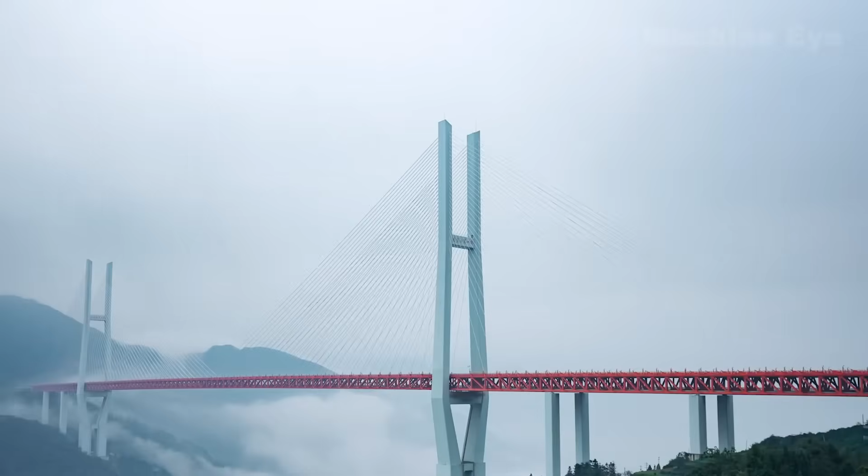Have you ever wondered how, in just a few decades, China transformed from having nothing into a global infrastructure powerhouse? The answer is hidden in this land bustling with activity. China, hailed as the infrastructure maniac, Chinese engineers have written their own legend through a series of world-shocking megaprojects. The once arrogant United States, upon witnessing China's true infrastructure might, had no choice but to bow down. They knew that many of the projects China built were simply beyond American capability.

Former US President Trump once openly declared that America would never be able to compete with China.

I love China. People say, oh, you don't like China. No, I love them. But their leaders are much smarter than our leaders. And we can't sustain ourselves. China, you go there now, roads, bridges, schools, you never saw anything like it. They have bridges that make the George Washington Bridge look like small potatoes. And they're all over the place.

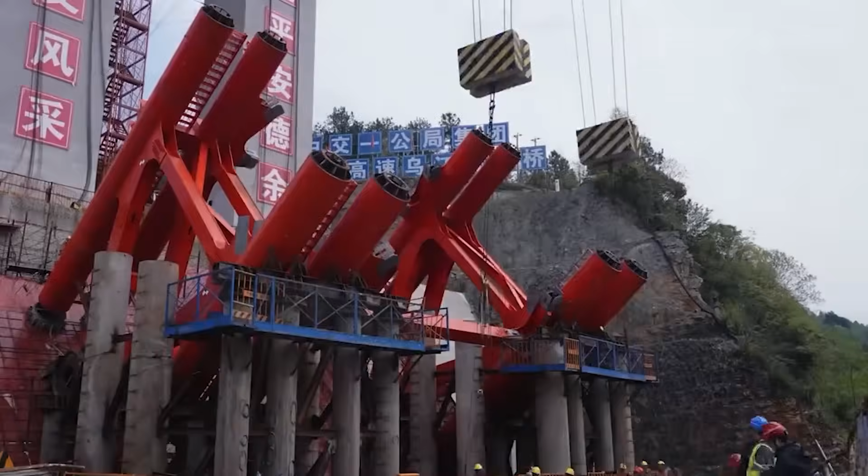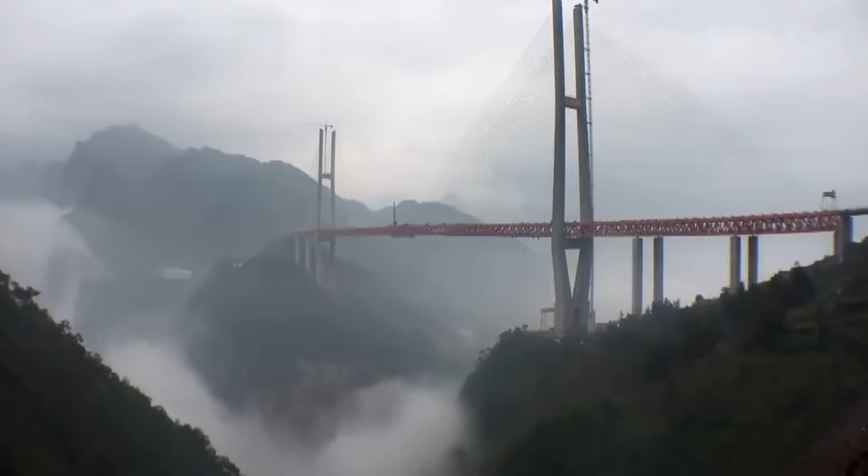When it comes to constructing large-scale projects, China literally clears mountains and builds bridges over waters, forging ahead through every obstacle just to create one engineering marvel after another. So, just how incredible is China's strength in infrastructure? And what untold secrets lie behind the nation's cutting-edge construction technology for mega projects? In this video, we will delve deep into the stories behind China's giant engineering feats.

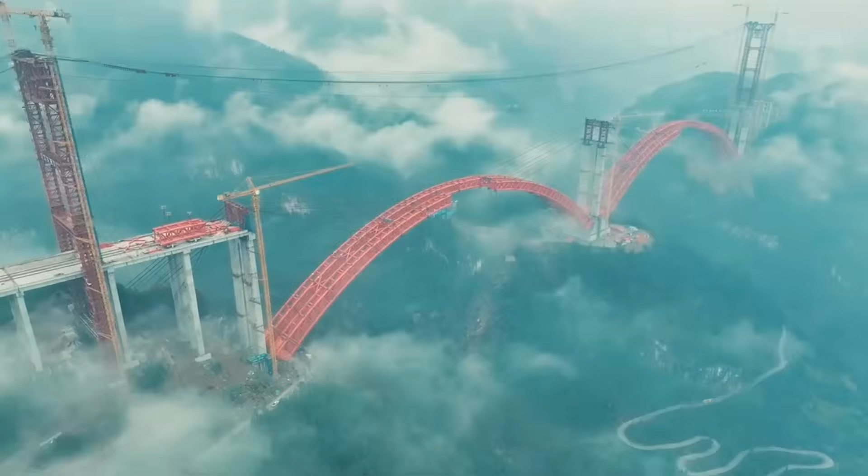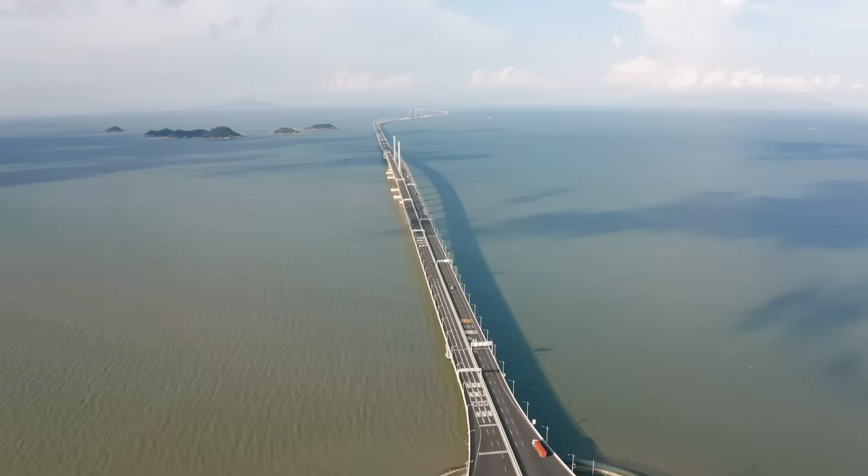As one of the world's largest developing countries, China has long driven its economic and social development through infrastructure. Its engineers are like superheroes in the field of construction, dedicated to creating monumental projects that meet the demands of a continually growing population. From the Baihetan hydropower station rising from the banks of the Yangzi River to the spiraling tunnel of the Yaxi Expressway that seems to float among the clouds, from the world's highest Qinghai-Tibet Railway to the Hong Kong-Zhuhai-Macau bridge spanning the Lingdingyang, from the hellish difficulty of the Sichuan-Tibet Railway to the 50-meter deep tunnel under the Pearl River estuary, Chinese engineers have redefined the limits of human infrastructure with projects once thought impossible.

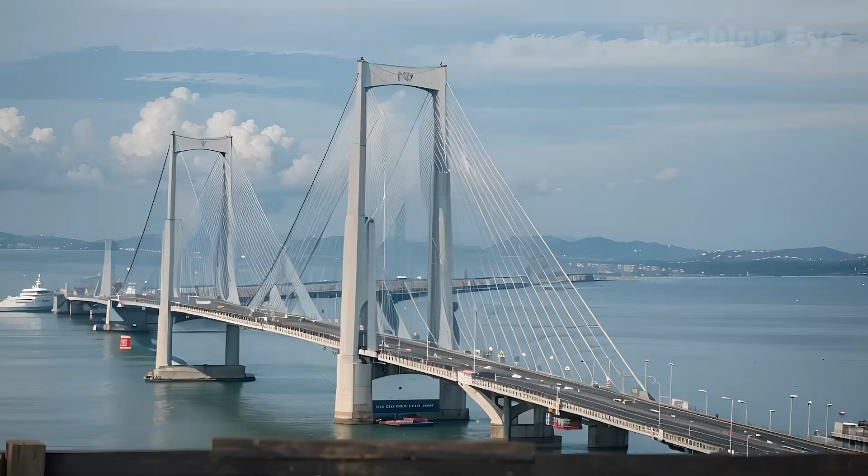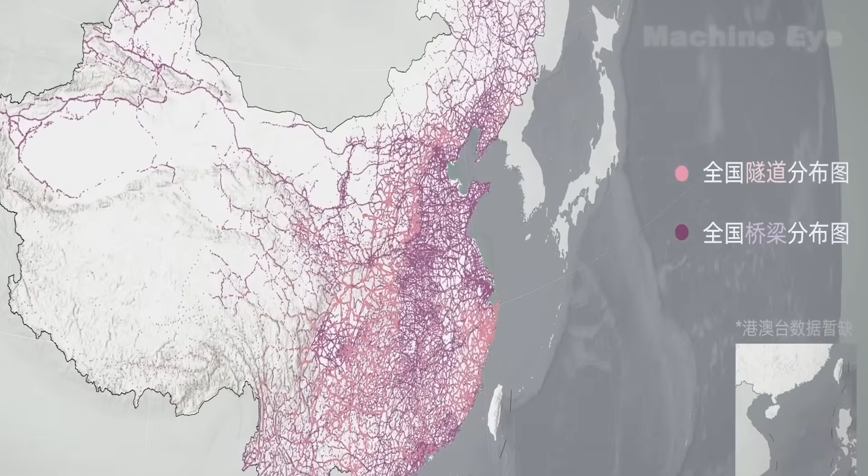While Americans were still embroiled in debates over repairing century-old bridges, China was reshaping the surface of the Earth by constructing 16,000 kilometers of highways and 4,000 kilometers of high-speed rail each year. When China's railway network in 1949 measured only 21,000 kilometers, with half of it in disrepair, who could have imagined that 75 years later, the nation would weave a traffic network spanning 45,000 kilometers of high-speed rail and 180,000 bridges, enabling people to travel thousands of miles in a single day?

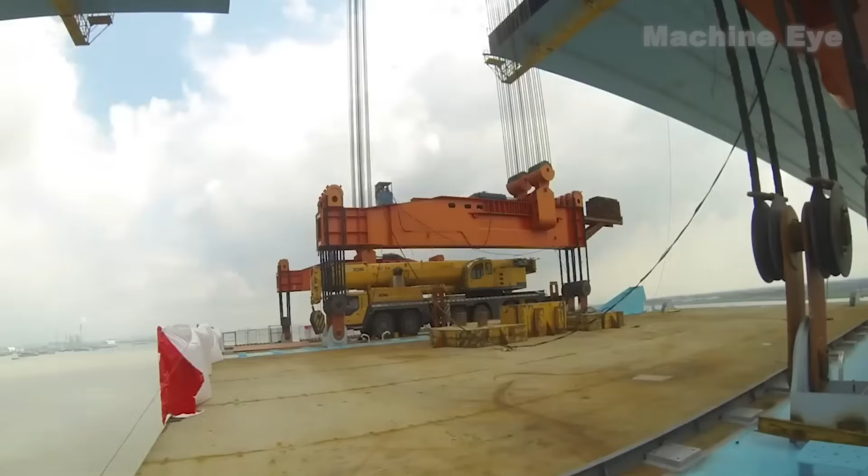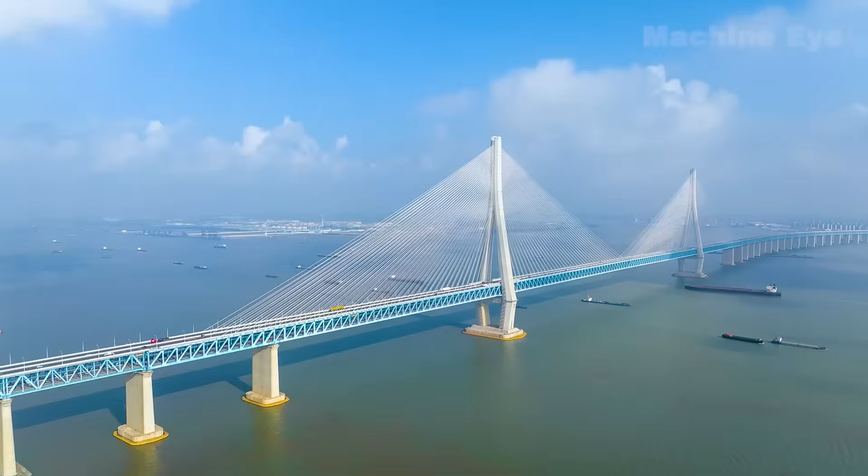Behind these achievements lies an Eastern wisdom that has upended Western perceptions. During the construction of the Hutong Yangtze River Bridge, China has developed a specialty steel possessing a tensile strength of 500 MPa, equivalent to a steel cable as thick as a chopstick lifting 3 main battle tanks. This breakthrough in material means that a cable-stayed bridge designed for both road and rail, with a 1,092-meter main span, is no longer merely a theoretical concept. As the world's first road-rail cable-stayed bridge with a main span exceeding 1,000 meters, it not only serves as the golden link of the Yangtze River economic belt but also stands as the pinnacle of Chinese infrastructure innovation.

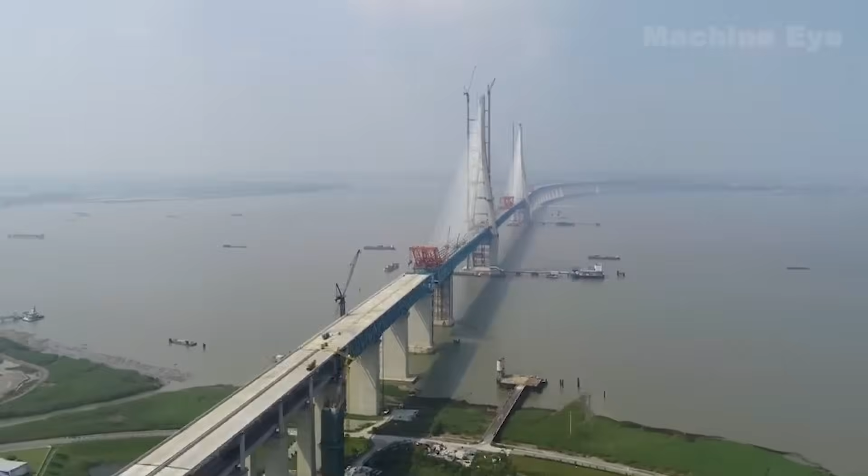The bridge features a main span of 1,092 meters, with two 330-meter high diamond-shaped main towers soaring into the sky, equivalent in height to a 110-story building. These towers bear an axial force of 300,000 tons, functioning like the mythical sea-calming needle that stabilizes the waters, their foundations firmly anchored in the riverbed.

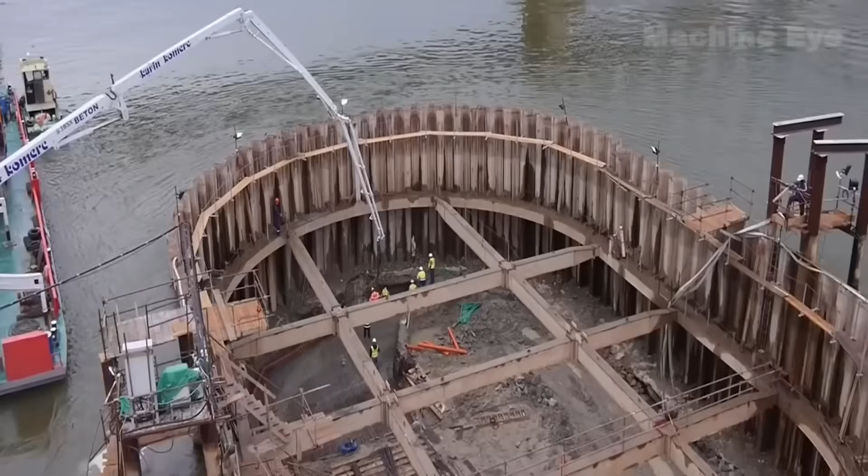To conquer the complex hydrological environment of the lower Yangtze River, engineers pioneered a groundbreaking precision positioning technology for a 15,000-ton steel caisson. They constructed a colossal caisson foundation spanning 5,100 square meters on the dynamic, sediment-laden riverbed, equivalent in area to 12 basketball courts, setting a world record.

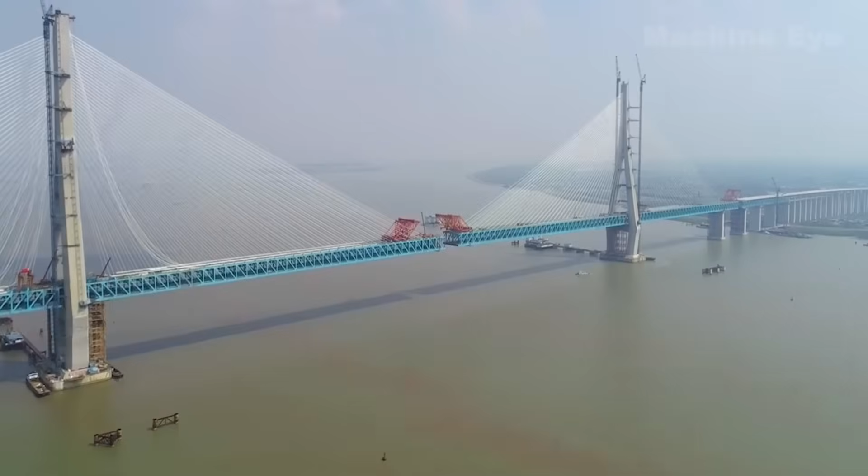The bridge employs self-developed ultra-high-strength steel that surpasses conventional materials in strength, paired with 2,000 megapascal grade stay cables. This steel and concrete framework supports a superload of 480,000 tons of steel and 2.3 million cubic meters of concrete, equivalent to the steel used in 12 Bird's Nest stadiums and the concrete volume of 8 national grand theaters.

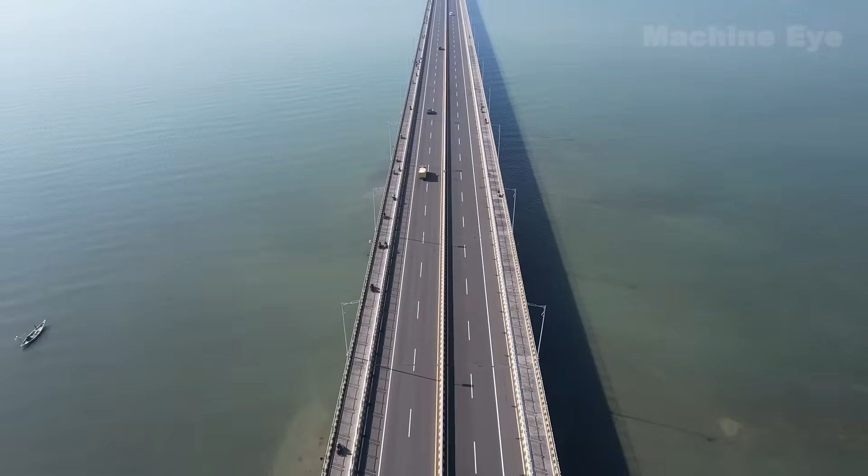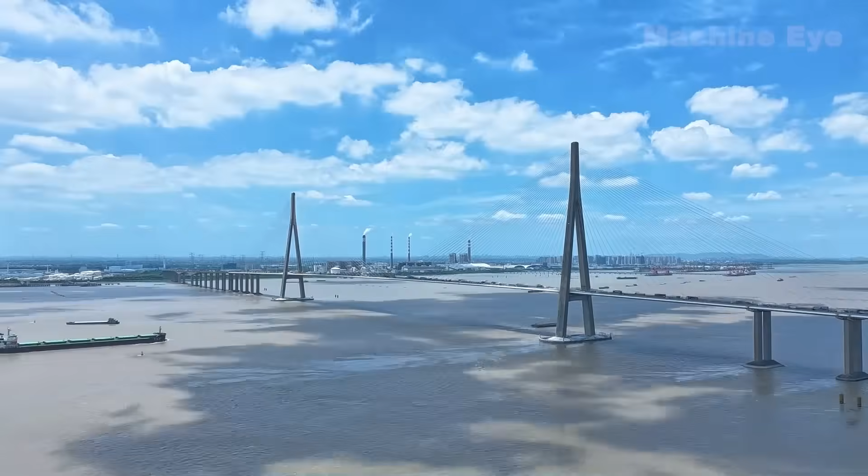By reducing the travel time between Nantong and Shanghai from 5 hours to just 1, the Hutong Yangtze River Bridge has revitalized the Yangtze River Delta's transport network, effectively unblocking the region's critical arteries like the meridians in traditional Chinese medicine. The bridge carries the Xitong Expressway, Hutong Railway, and Tongsujiayong high-speed rail, handling over 100,000 vehicles daily and 80 million tons of annual freight, forming a super corridor linking coastal economic zones.

Its 1,092-meter-wide main channel accommodates 100,000-ton vessels, achieving harmonious coexistence of maritime and land transport. International netizens marveled at the spectacular steel beam closure process.

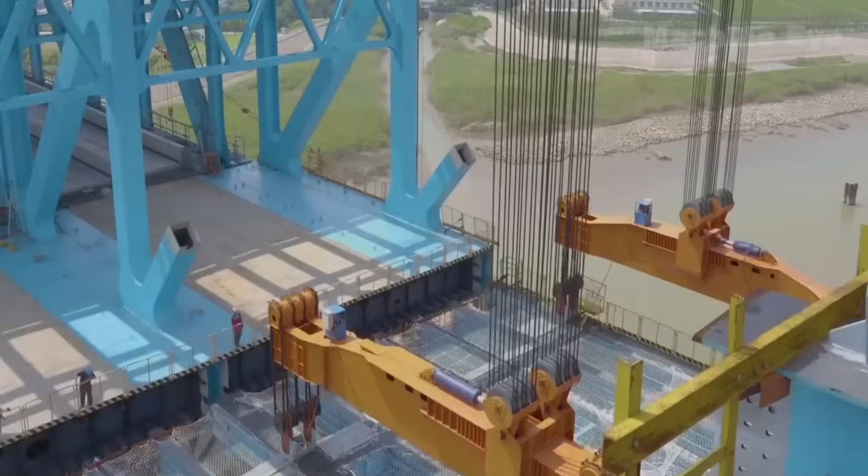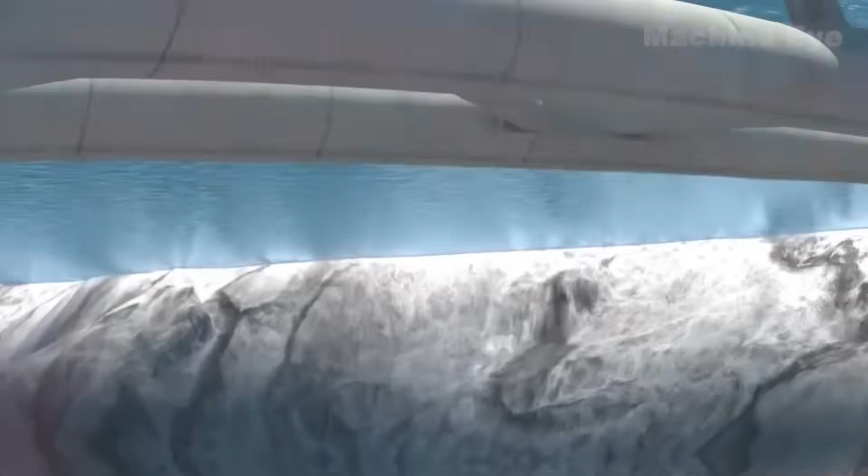Through the Hong Kong-Zhuhai-Macau Bridge, Chinese technical standards are gaining global recognition. As foreign media noted, while other countries are still debating how to build bridges, China is already defining the future through its actions.

Beneath the waves of the Lingding Channel, a 6.7-kilometer steel leviathan silently intertwines Hong Kong, Zhuhai, and Macau. This is the Hong Kong-Zhuhai-Macau Bridge's undersea tunnel, the world's longest road-immersed tunnel, standing as the pinnacle of China's infrastructural wisdom and daring.

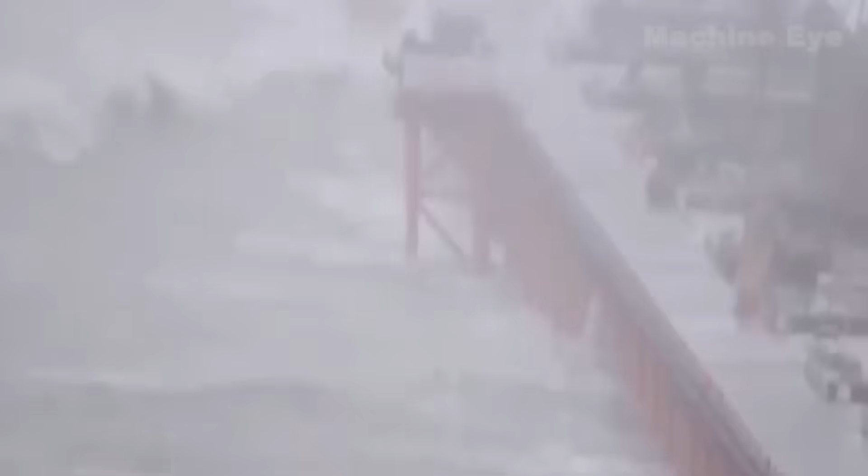But why did Chinese engineers choose this underwater path? The answer lies in dual challenges. Lingding's waters host both bustling international shipping lanes and flight paths beneath Hong Kong International Airport. Traditional bridge towers would have endangered maritime navigation and aircraft operations, while dynamic seabed sedimentation made conventional piers unstable.

Demonstrating extraordinary vision, Chinese engineers pioneered a revolutionary bridge-island-tunnel cluster design. Artificial islands now seamlessly transition surface bridges to submerged tunnels, simultaneously safeguarding navigation, overcoming airspace restrictions, and conquering geological complexities.

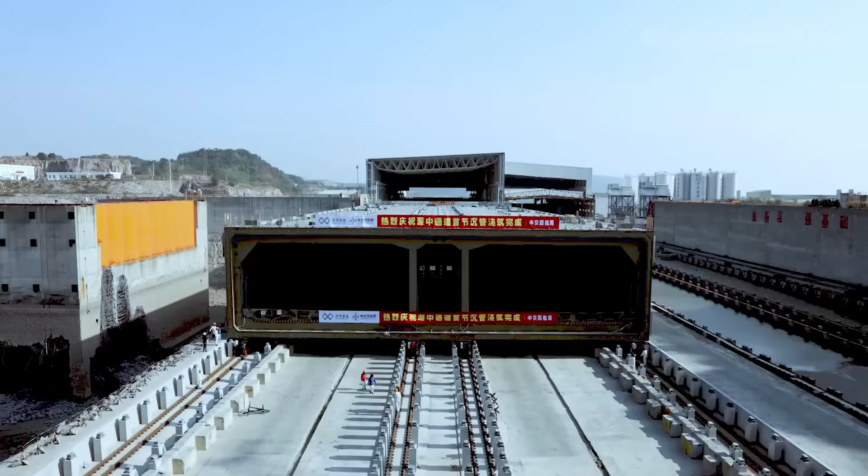At Zhuhai's Niutou Island, in the world's largest immersed tube prefabrication facility, 33 massive tube sections were quietly produced. Each section is 180 meters long and weighs 74,000 tons, comparable in scale to a medium-sized aircraft carrier.

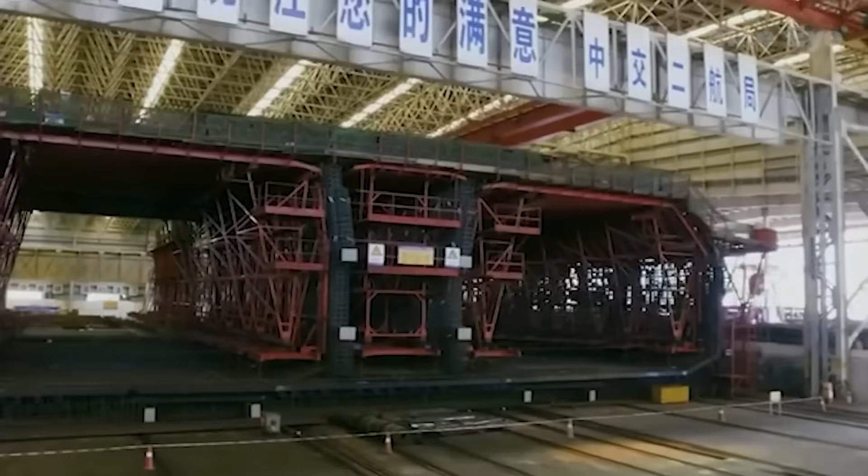Engineers pioneered the curved immersed tube factory method, fabricating curved tube sections with a radius of 5,500 meters to millimeter-level precision, breaking free from the limitations of straight-line production.

Once towed from the prefabrication yard to the construction site, these tubes must navigate complex ocean currents. A formation of 8 high-powered tugboats, coordinated by satellite positioning and an intelligent control system, precisely delivered each tube section into position. Then, harnessing the buoyancy of water, the immersed tube gently descended 44 meters to its seabed foundation trench.

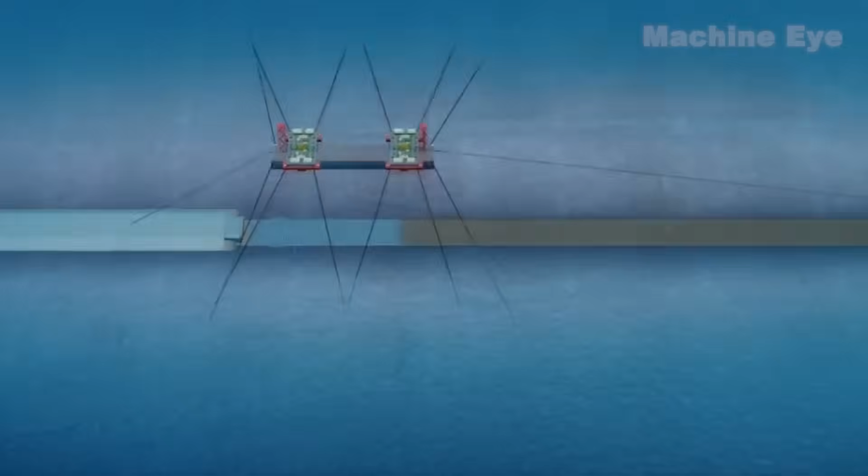Through China's independently developed deep-water unmanned installation system, an astonishing joint tolerance of merely 3 millimeters was achieved between tube sections, a precision feat lauded by international media as the subsea kiss of perfection.

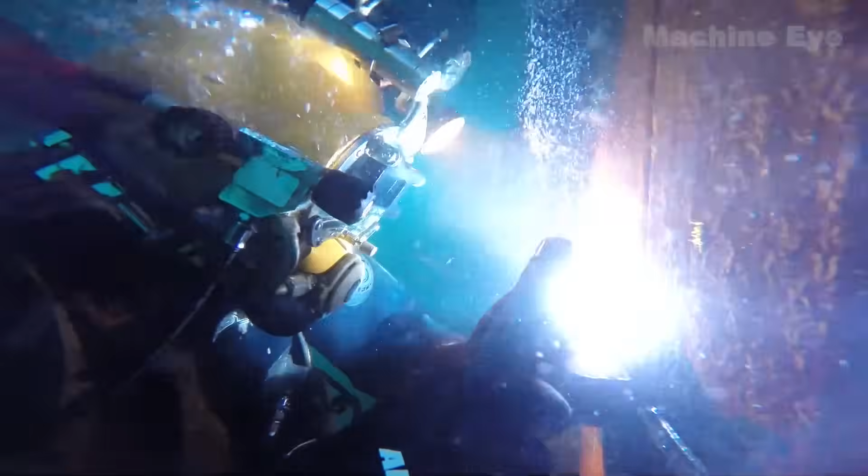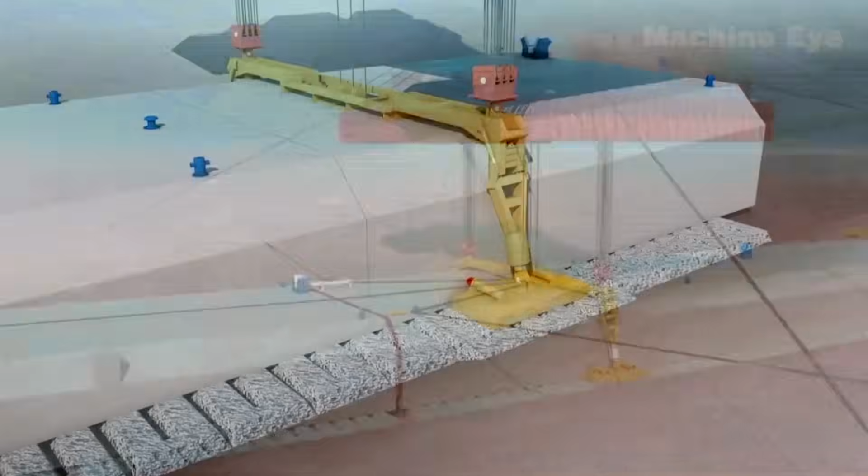Traditionally, immersed tubes rely on risky underwater welding to ensure watertight seals. Chinese engineers pioneered a revolutionary active compression sealing technology. They installed retractable steel bulkheads at tube ends, employing hydraulic systems to actively compress rubber gaskets, transforming manual processes into mechanized operations that guaranteed absolute water impermeability. This innovation enabled the final joint installation to be completed in just 1 day, achieving a 10-fold efficiency improvement.

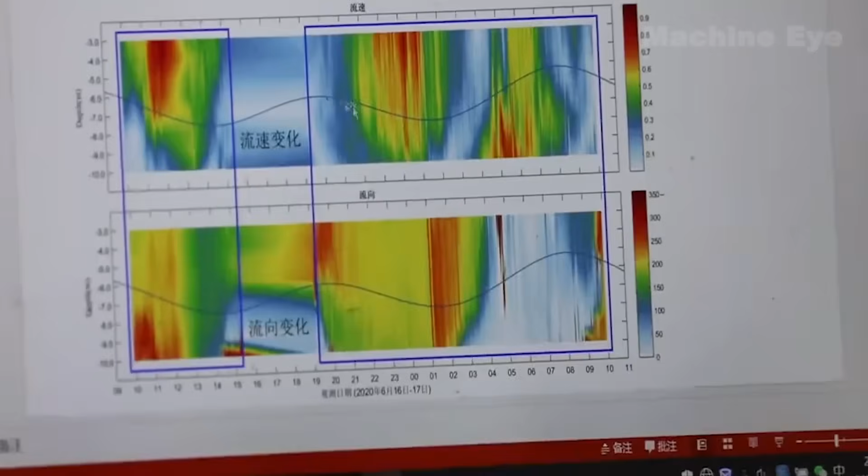To monitor the immersed tube's positioning, engineers deployed high-precision microelectromechanical gyroscopes and tilt sensors, capturing ultra-low-frequency motion data in real time. This ensured the 33 tube sections fit together with the precision of interlocking building blocks.

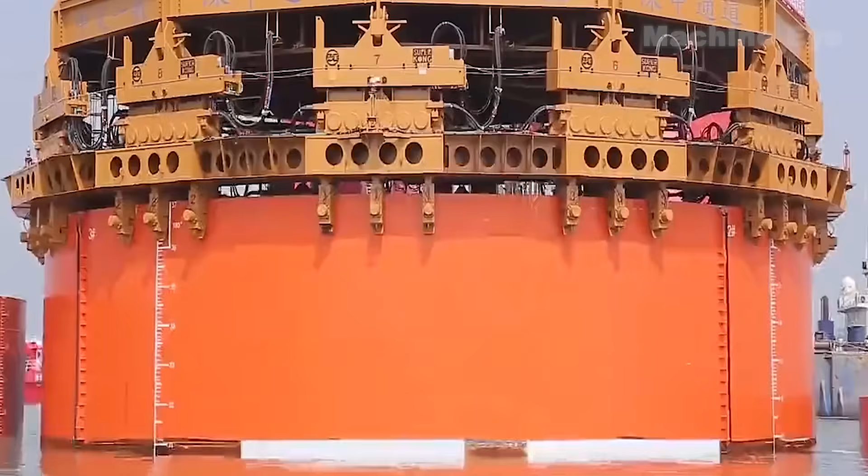At both ends of the tunnel, the artificial islands feature steel cylinder retaining structures. 120 steel tubes, each measuring 22 meters in diameter, are driven deep into the seabed, forming a robust foundation that withstands ocean currents and typhoon forces.

From the Øresund Strait in Denmark to Busan in South Korea, no immersed tunnel worldwide had ever exceeded 3.5 kilometers, until the Hong Kong-Zhuhai-Macau tunnel rewrote history with its staggering 6.7-kilometer span.

International media marveled: 33 colossal tubes aligned on the seabed with a cumulative error less than the width of a human hair. Chinese engineers have redefined the limits of deep-sea engineering.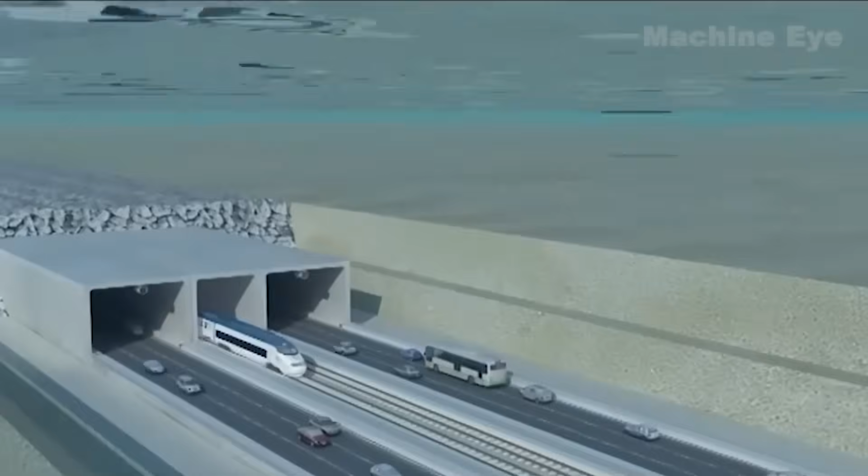More than a physical passage, this tunnel symbolizes China's transformation from an infrastructure follower to a standard setter. Through this 6.8-kilometer undersea marvel, China demonstrates that its engineering prowess can tame the vast oceans, inscribing a new chapter in the annals of human engineering.

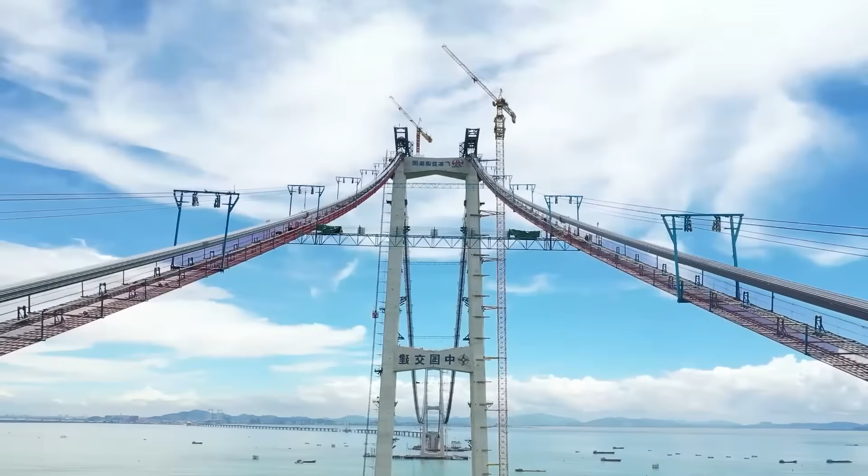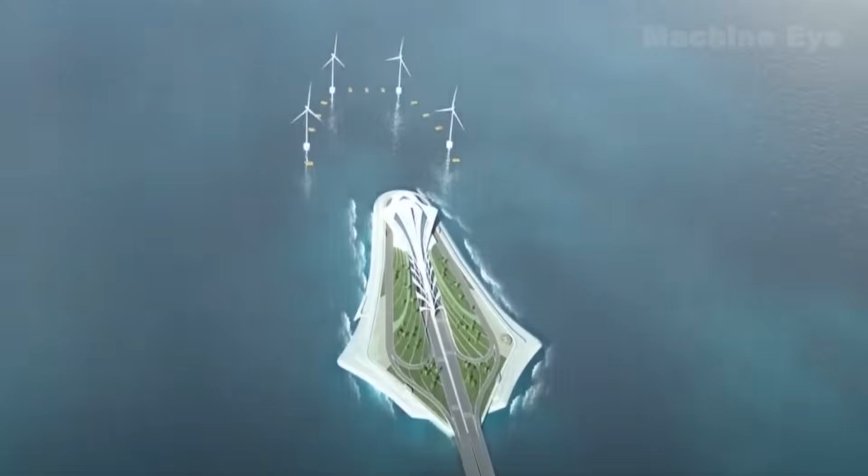In addition, Chinese engineers have constructed another colossal engineering project that has astonished the world: the Shenzhen-Zhongshan link, an engineering colossus spanning turbulent waters. A core transportation hub project in the Guangdong-Hong Kong-Macau Greater Bay Area, stretching 24 kilometers in total, this project is an integrated cross-sea engineering feat combining bridges, islands, tunnels, and underwater interchanges, including an undersea tunnel that spans approximately 6.8 kilometers.

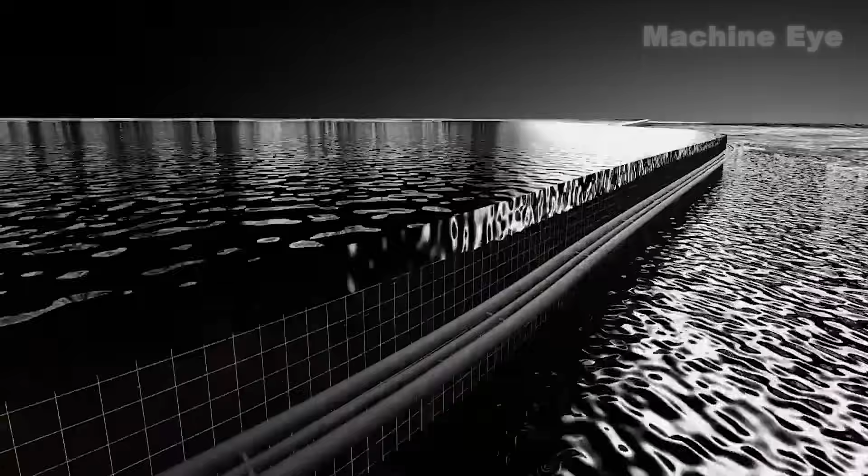In this tunnel, engineers embedded 23,000 fiber optic sensors within the immersed tubes, allowing the concrete to sense stress changes in real time, much like human nerves. This technology is 40% more sensitive than its Western counterparts, prompting even the journal Nature to exclaim, "The Chinese have taught concrete how to think."

Next, we will examine in detail how Chinese engineers built this undersea tunnel. This tunnel, 6.8 kilometers long, is designed with 8 lanes in both directions, 2 more lanes than the Hong Kong-Zhuhai-Macau tunnel. It is composed of 32 giant immersed tubes and a final joint, buried more than 40 meters beneath the sea.

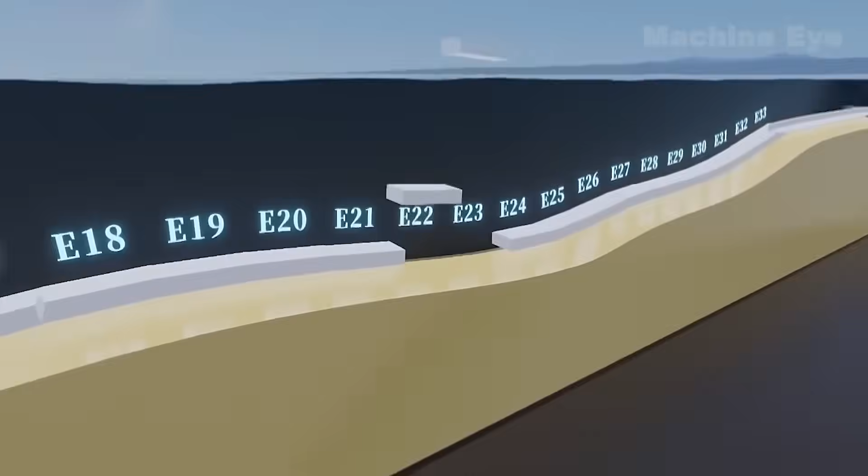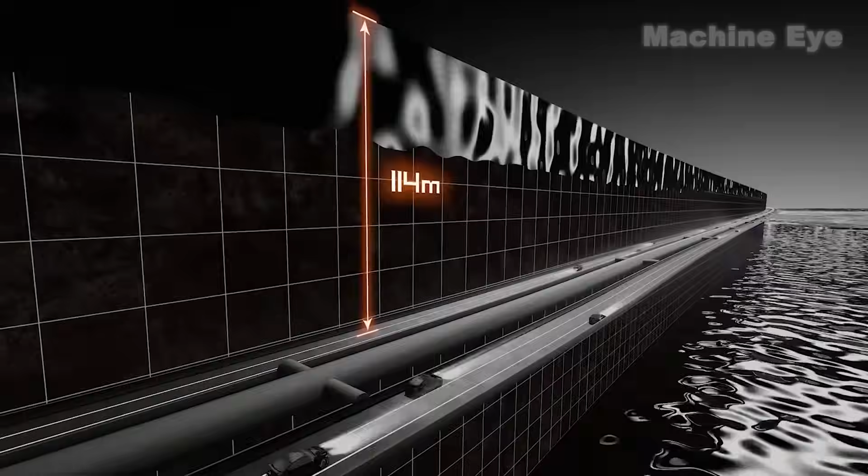When Dutch immersed tube specialists declared an 8-lane bidirectional configuration impossible, Chinese engineers staged a subsea engineering marvel in the Pearl River estuary, deploying an innovative steel-concrete sandwich composite structure that defied Western engineering conventions.

Traditional immersed tube tunnels typically employ cast-in-place reinforced concrete, a process that is both labor-intensive and time-consuming. For the Shenzhen-Zhongshan link's undersea tunnel, engineers adopted a steel shell design.

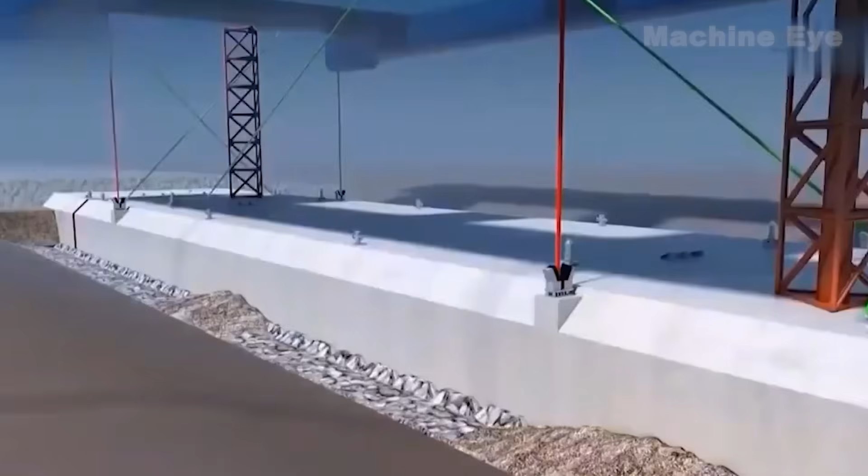However, the 8-lane configuration significantly widens the tube structure, with each additional lane increasing hydrostatic pressure by 27%, approximately 20,000 metric tons per lane—equivalent to bearing the combined weight of 15,000 sedans. Compounding this challenge, the overhead navigation channel accommodates 10,000-ton cargo vessels. The dual pressures from hydrostatic forces and shipping loads create a structural conundrum akin to crushing forces on a beverage can, potentially causing tunnel deformation.

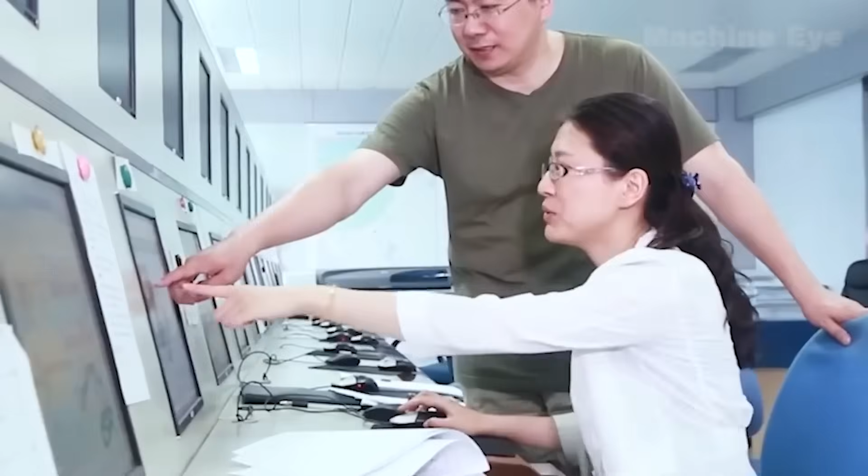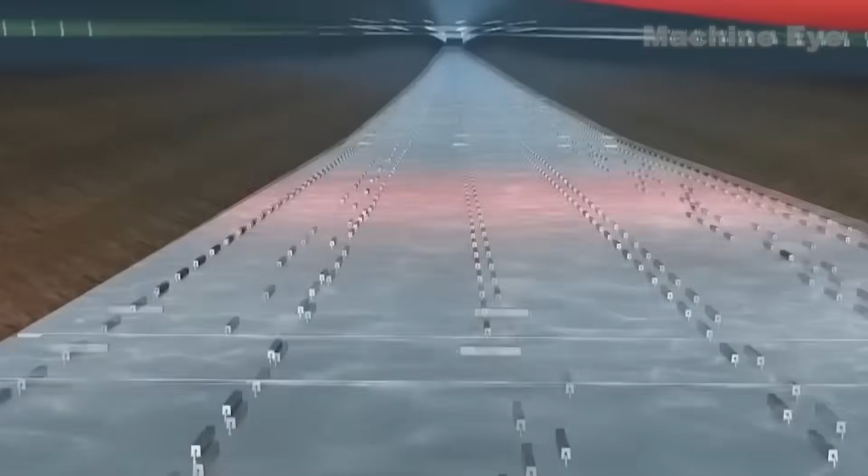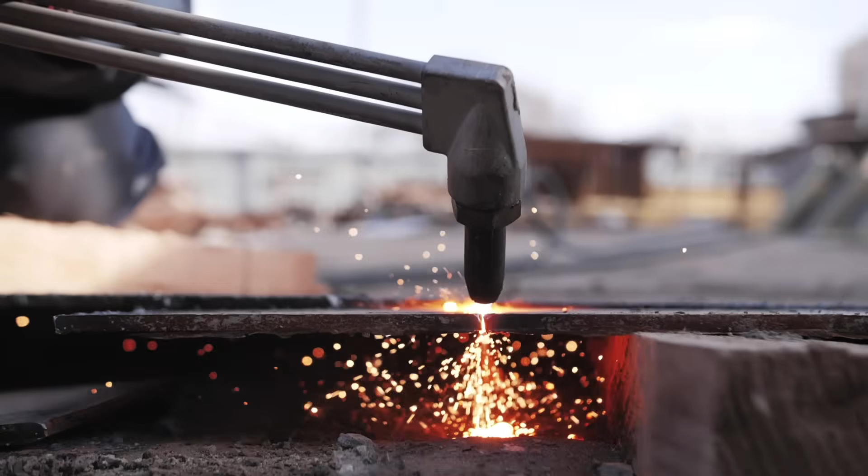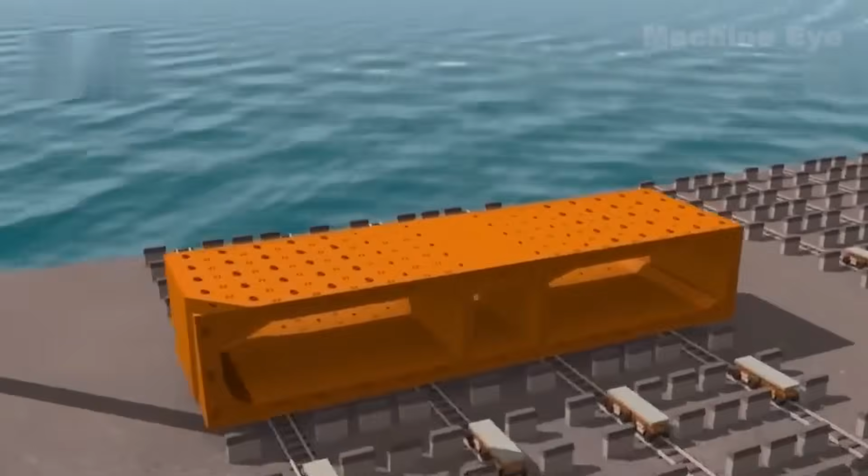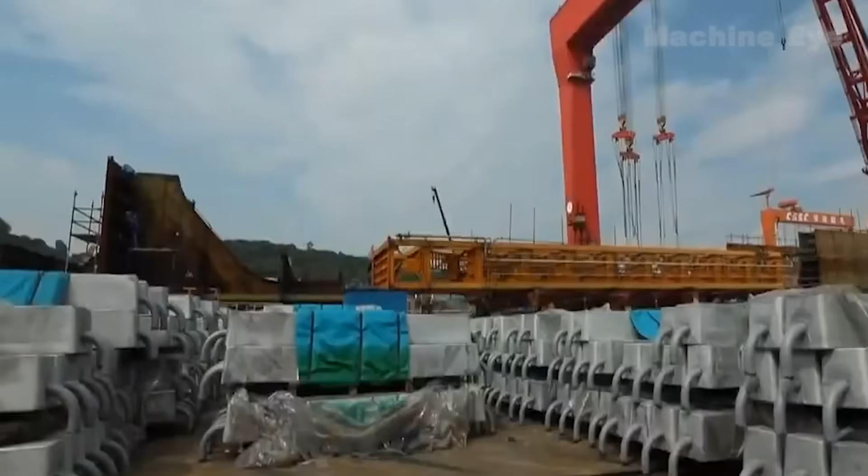Besides the robust and watertight exterior, ensuring that the tube remains corrosion-free for 100 years underwater is key. After the steel shell is completed, its surface is sprayed with 5 layers of anti-corrosion coating with a molecular structure that mimics shark skin, leaving no foothold for algae or bacteria. Each tube is then equipped with 552 sacrificial anodes, ensuring that under their protection, the tube can be safely used for a century. Next, the tube is transported to another facility for the final concrete pouring.

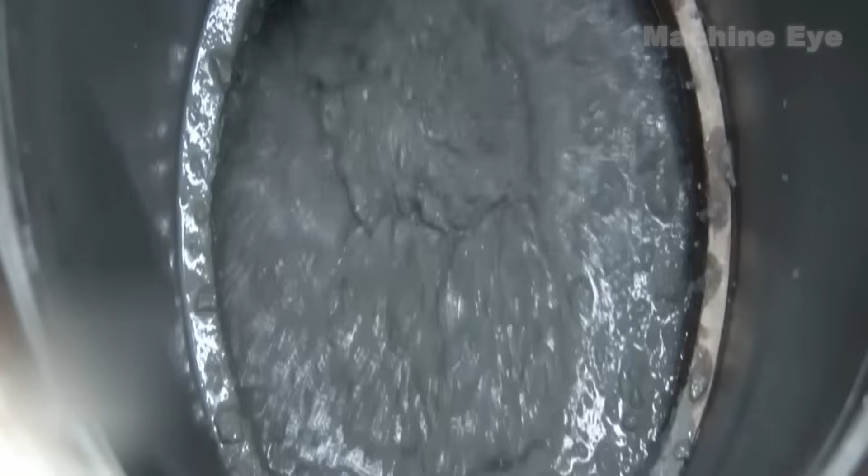The underwater immersed tubes of the Shenzhen-Zhongshan bridge are designed with a steel shell concrete structure. Once the steel shell is completed, its inner chamber is filled with concrete. The total volume of concrete for 32 tubes exceeds 1 million cubic meters. At this point, manual labor could no longer keep pace, necessitating the use of intelligent concrete pouring robots.

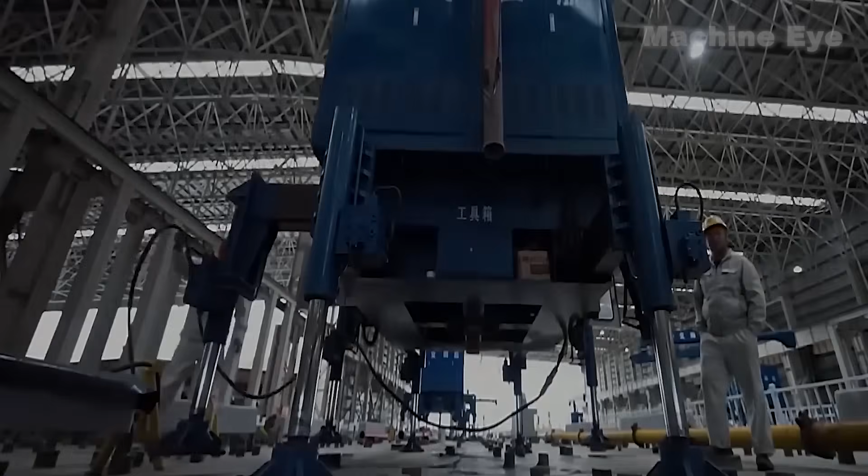These robots autonomously move along predetermined routes on the tube's top slab, automatically detect and drill holes, and perform the pouring operation entirely on their own. Using 1,200 sensors to continuously regulate the concrete's flow rate, these smart robots compressed a process that traditionally took 90 days into just 28 days.

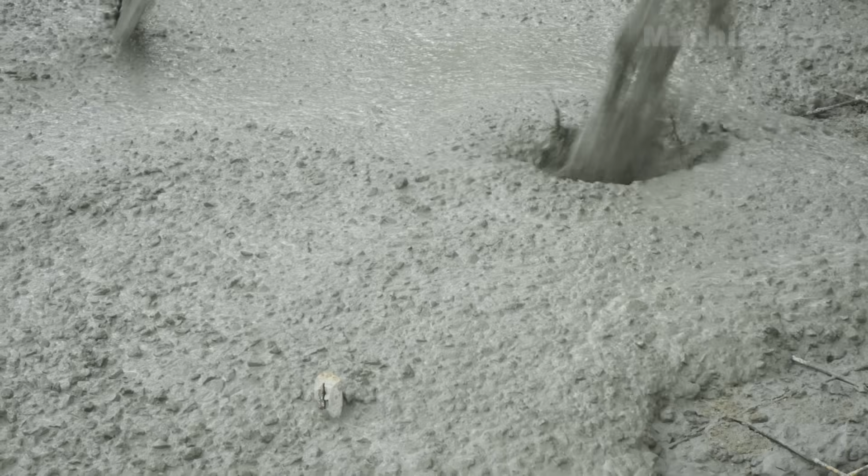Even more astonishing is the zero manual vibration technique. Self-compacting concrete flows like melted dark chocolate into every crevice with nanometer-level precision, comparable to the intricate distribution of capillaries in the human body. To formulate the optimal composition ratio, engineers dedicated 3 years to systematic experimentation, even building a full-scale tube module to simulate the tube's ability to withstand more than 1,000 typhoons and resist a level 9 earthquake, as well as a scenario in which sea levels rise by 3 meters by 2075.

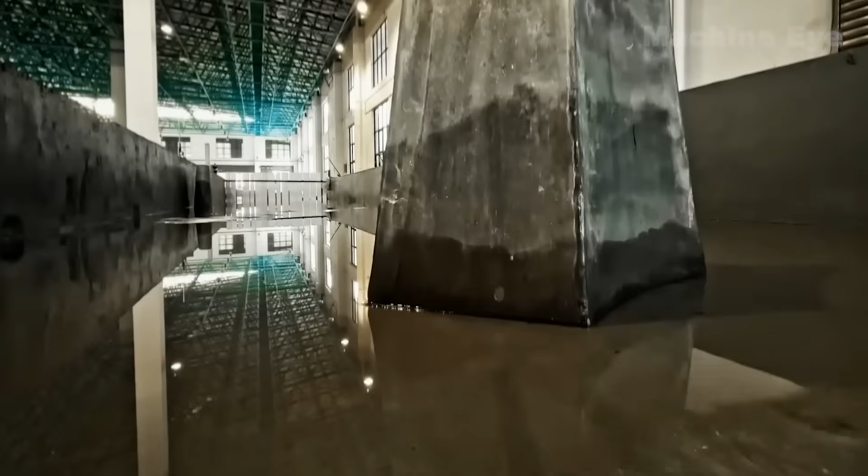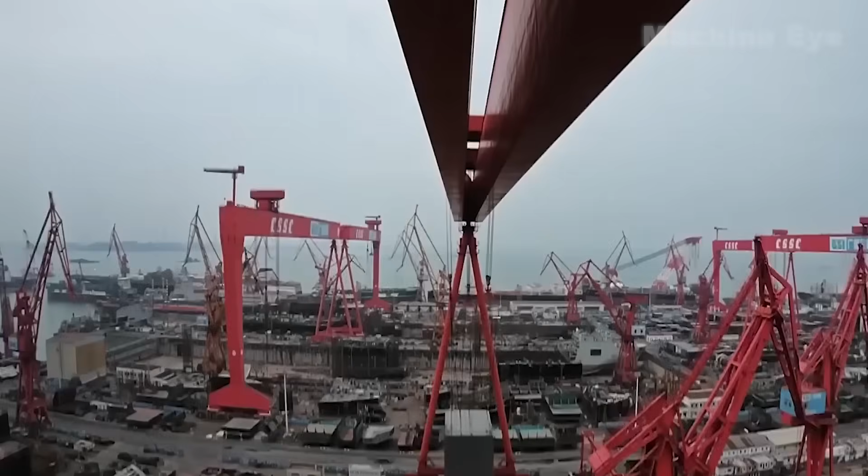This die-before-rebirth Eastern philosophy reduced the project risk by 83%. These simulation tests effectively validated the reliability of using this specialized concrete in the immersed tubes. Although this concrete's strength and flowability meet the requirements for casting the tubes, once it leaves the batching plant it must be poured within 90 minutes. This critical requirement led to the creation of an intelligent manufacturing facility capable of casting 1 tube section per month, earning its reputation as the Smart Dream Factory for immersed tube prefabrication.

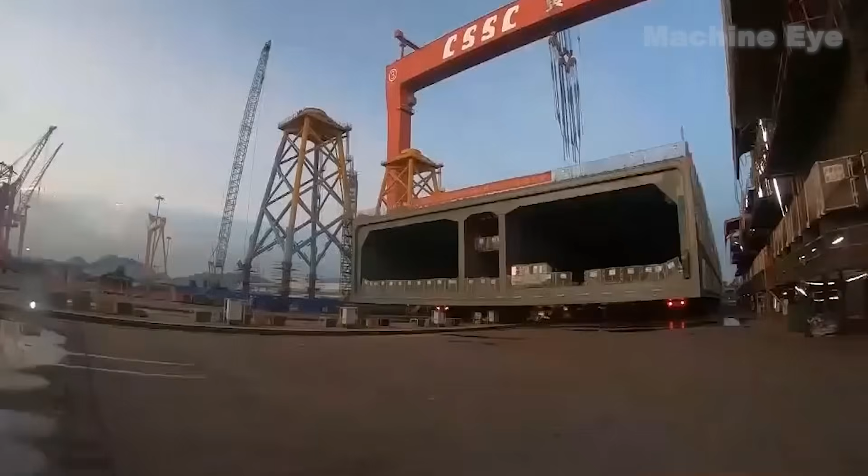A complete steel shell immersed tube weighs as much as 80,000 tons. Moving it a mere 200 meters to the departure area is no small feat given its massive weight. With 200 transport vehicles and over 1,000 steel wheels, the 80,000-ton tube was slowly moved and transferred in just 4 hours, a task that used to take 7 days for a tube of similar mass.

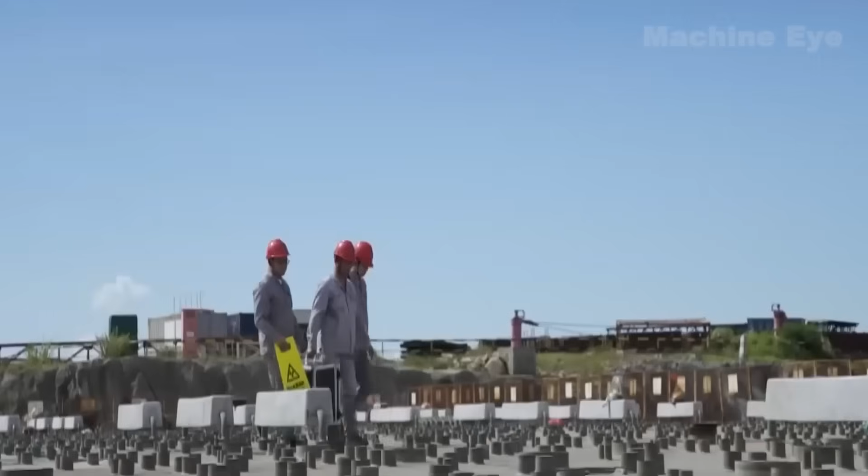Before a tube can be brought in or out, workers must conduct final inspections. Using millimeter precision, non-destructive testing equipment, the density of the concrete can be assessed without damaging the steel shell. Once approved, the tube is fitted with a ballast water tank and steel sealing doors, then maneuvered by buoyancy into a deep water dock. Next, it is ready for installation.

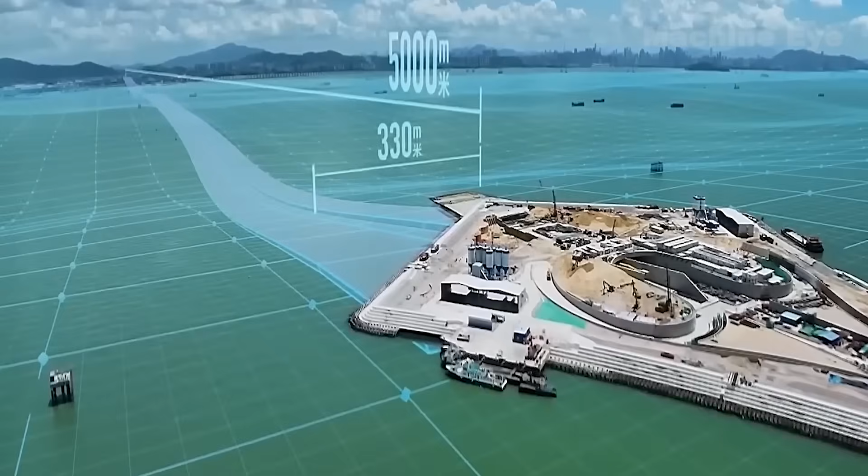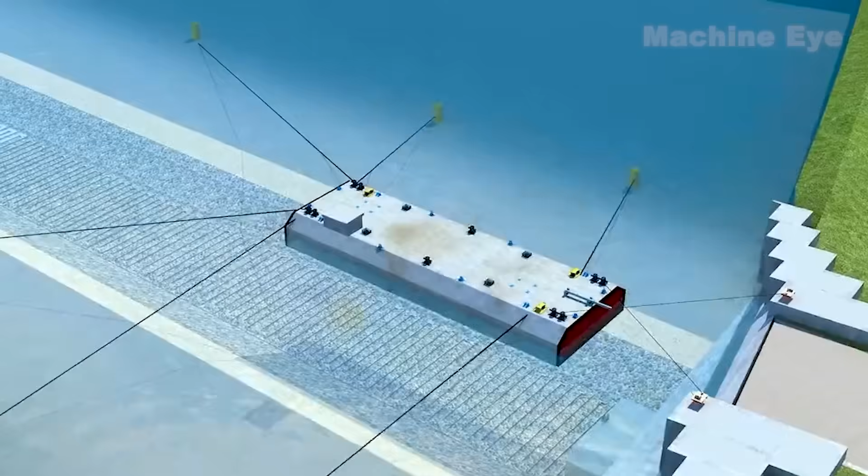How do you excavate a 5-kilometer-long, 330-meter-wide deep-sea trench 40 meters below the surface? The answer lies in the choice of construction machinery. In the undersea tunnel section of the Shenzhen-Zhongshan bridge, the seabed is scattered with uneven weathered rock. Before laying the immersed tubes, the seabed must first be leveled.

This is where specialized drilling tools come in. A 35-ton drilling hammer, weighing as much as 3 main battle tanks, free falls to shatter granite. Each impact releases energy equivalent to 2.5 kilograms of TNT. Yet it can control the trench's precision within plus or minus 4 centimeters, more stringent than the installation standards for benches in New York's Central Park.

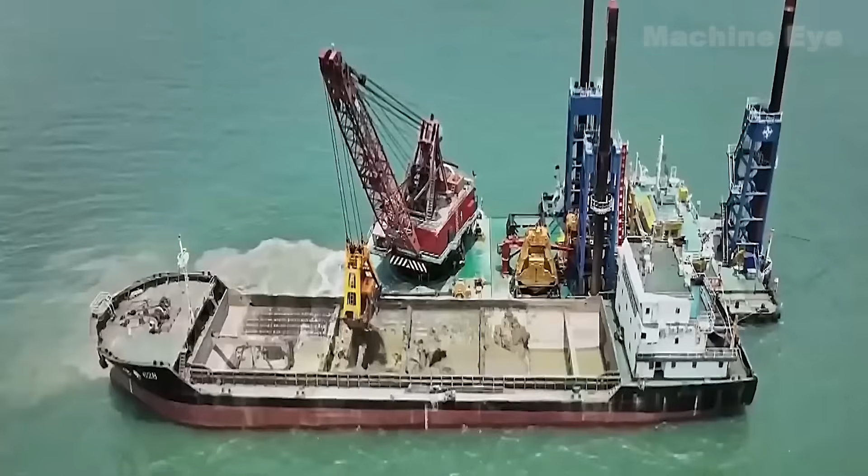Meanwhile, another vessel uses a powerful grab bucket to clear out rubble. If excavating the trench is like laying a bed for the tubes, then throwing and leveling stones is like adding a mattress, a crucial step to ensure the precise alignment of the tunnel's tube sections.

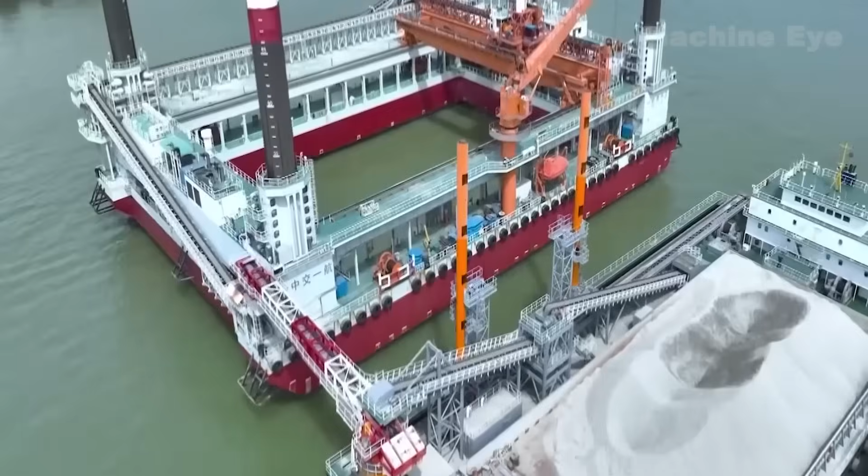The Jinping No. 2 leveling vessel is the star of this phase. Upon reaching the exact location of the tunnel, 4 70-meter high support pillars are driven into the seabed for positioning, and rubble is transported via conveyor to the stone-laying pipe. The discharge outlet then lays the stone evenly at a regulated speed on the seabed, maintaining precision within 4 centimeters. Every 4 days, the leveling work for 1 tube section is completed.

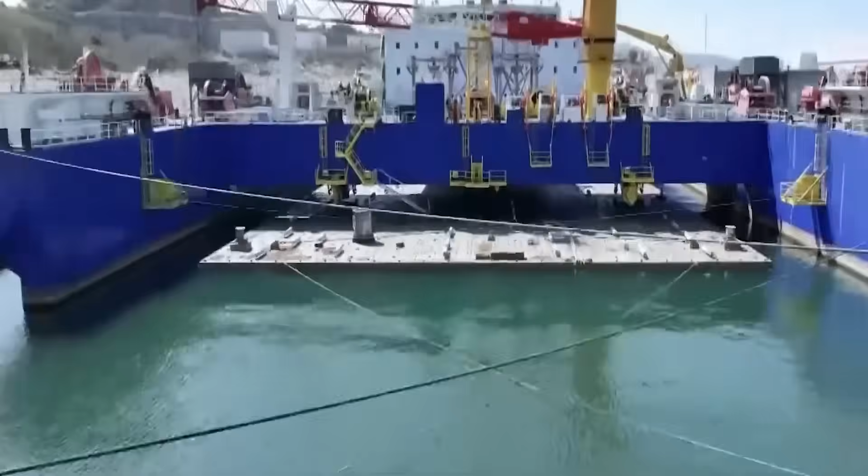Once the tunnel's trench is prepared, the world's first integrated floating and installation vessel, Jinan No. 1, sets sail carrying an 80,000-ton immersed tube out of the dry dock. At 1 o'clock in the morning, Jinan No. 1 successfully reached the lowering position.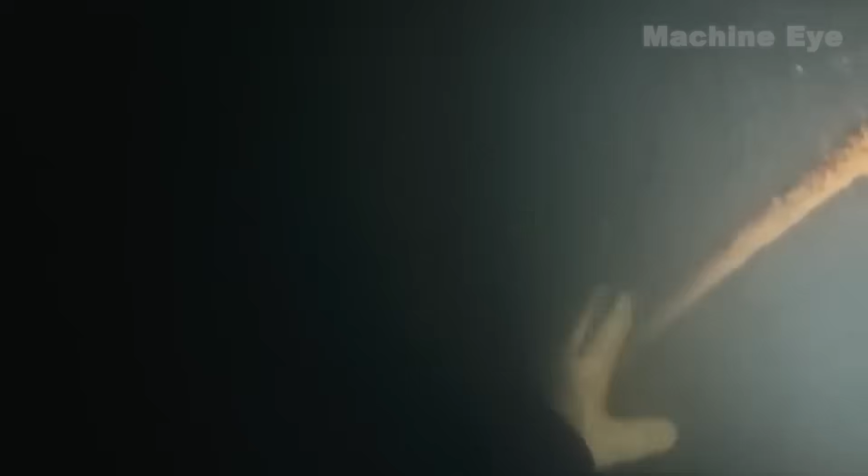Under the guidance of cables, the tube was slowly lowered until it reached the trench, where it was connected to the previous tube section via pole rods. To ensure installation accuracy, divers went underwater to transmit real-time images. After a final hour of fine-tuning, the deviation at the joint was reduced to an astonishing 0.8 millimeters, thinner than a human eyelash, breaking the world record for underwater immersed tube alignment.

Dutch supervisor Janssen recorded in his log, "This is the Apollo moment of engineering."

Now that the Shenzhen-Zhongshan bridge is fully operational, a brand new landmark mega project spans the Pearl River estuary. When the first car's headlights pierced the darkness of the undersea tunnel, it was not just the rebirth of a transportation artery, but an epic dialogue between humanity and the ocean.

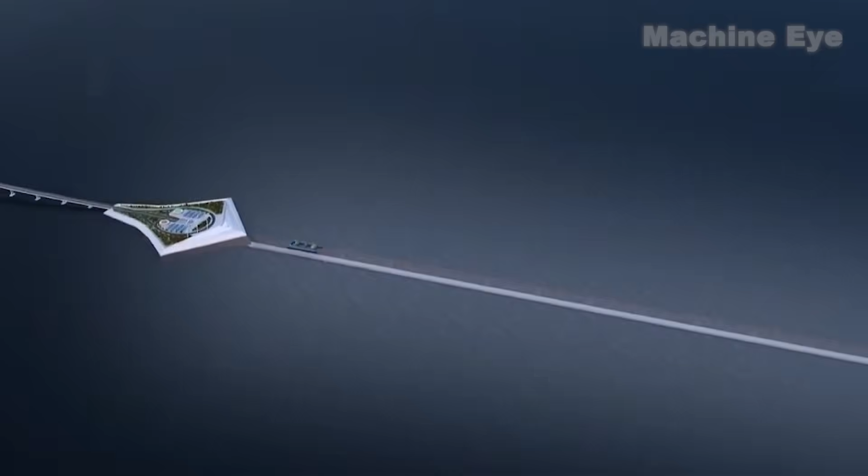Chief Engineer Song Shenyou told reporters, "We spent 16 years turning a wild idea on paper into a routine reality that millions cross every day." Regarding this project, the chief engineer further elaborated.

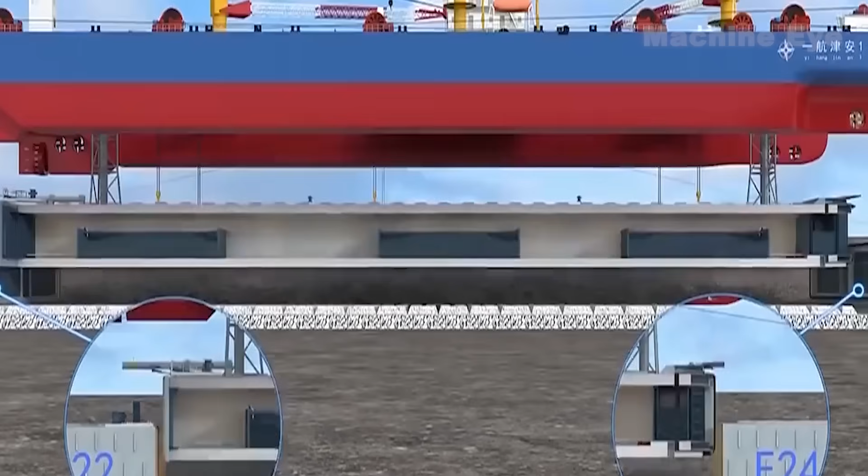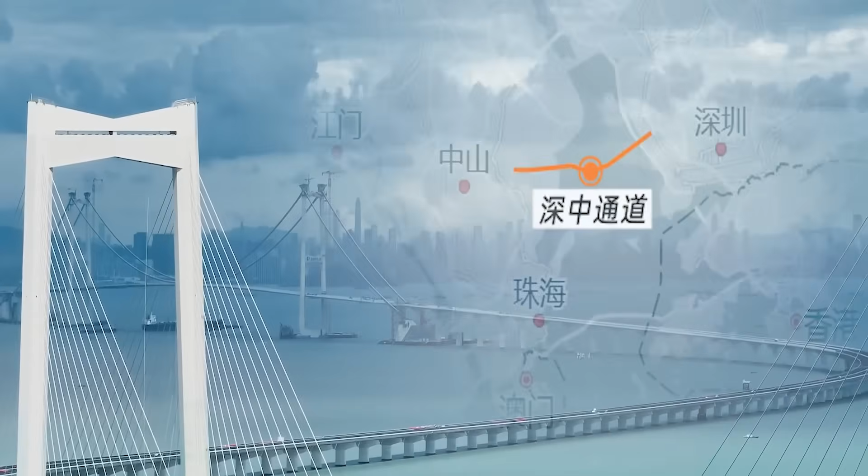If the Hong Kong-Zhuhai-Macau Bridge is a maritime link binding Guangdong, Hong Kong, and Macau together, then the Shenzhen-Zhongshan Bridge is the key to opening up the golden inner bay of the Pearl River estuary, further boosting economic development in the Greater Bay Area.

Chinese engineers have built heavenly ladders in the mountains and dragons on the seas, creating a transportation network that enables thousands of miles of travel and seamless connectivity across lands and oceans. What once were unimaginable feats have now become everyday realities in China.

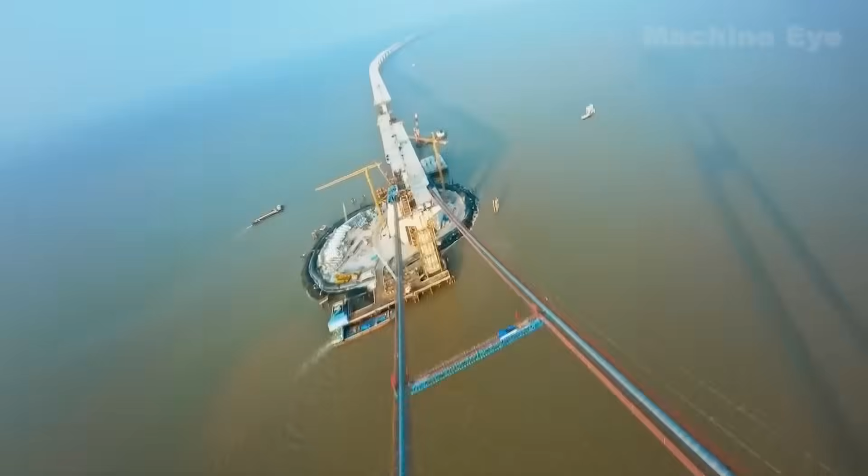With its global leading scale, complexity, and speed, Chinese infrastructure has become a shining national card that captures the world's attention. From the lofty Yaxi Expressway to the bridges and tunnels carving through the towering mountains of Sichuan and Chongqing, breaking 7 world records along the way, China has turned natural obstacles into thoroughfares for economic and social development, significantly improving people's livelihoods and paving the way for rural revitalization.

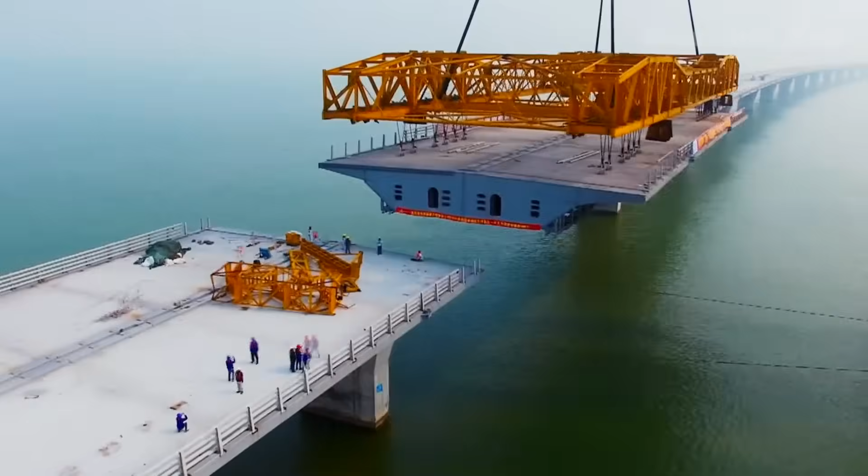The Hong Kong-Zhuhai-Macau Bridge is the most technologically complex, challenging, and massive bridge in the history of road construction, setting multiple world records and establishing core technologies with independent Chinese intellectual property rights.

In 2024, with the opening of the Shenzhen-Zhongshan Bridge and the Huangmao Cross-Sea Bridge, the Greater Bay Area will realize the one-hour living circle. Roads and bridges have shattered the constraints of time and space, fostering coordinated socio-economic development.

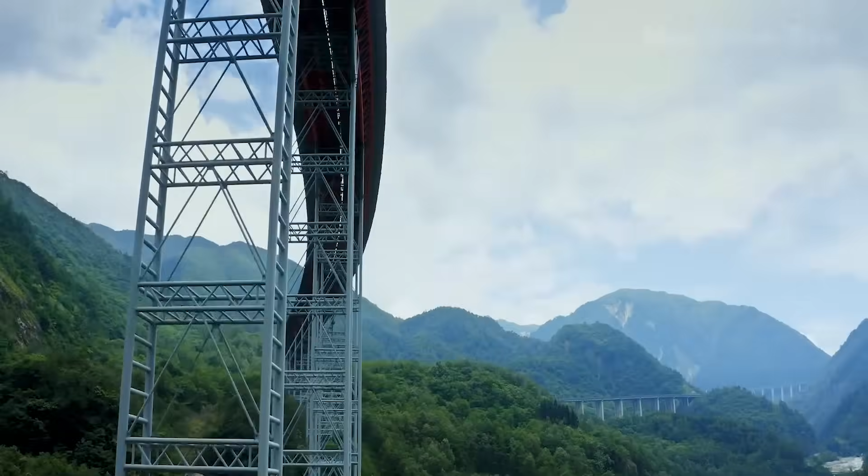The expansion of China's railway network and breakthroughs in independent research and development have dramatically transformed the lives of its people. In a country boasting the world's largest high-speed rail and highway networks, traversing thousands of miles in a day is now a part of daily life.

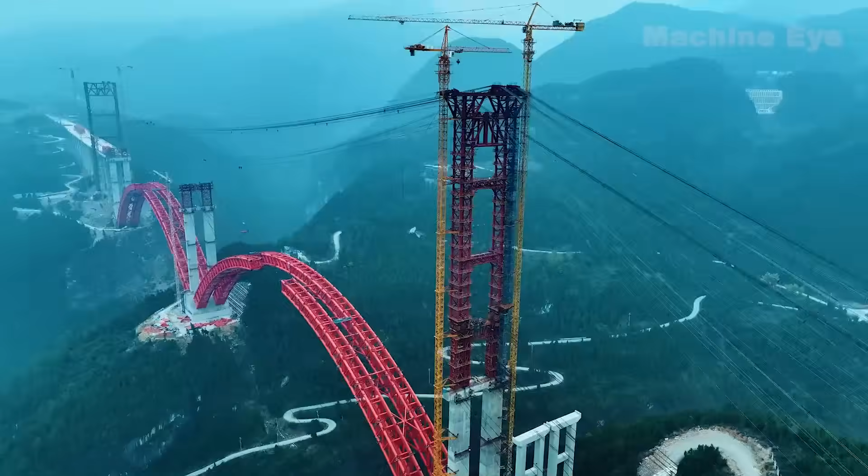With each mega project built, China continues to overcome world-class engineering challenges through innovative techniques and advanced construction methods, earning it the moniker Infrastructure Maniac. Moreover, China has undertaken major projects in numerous other countries, each emblematic of its development drive.

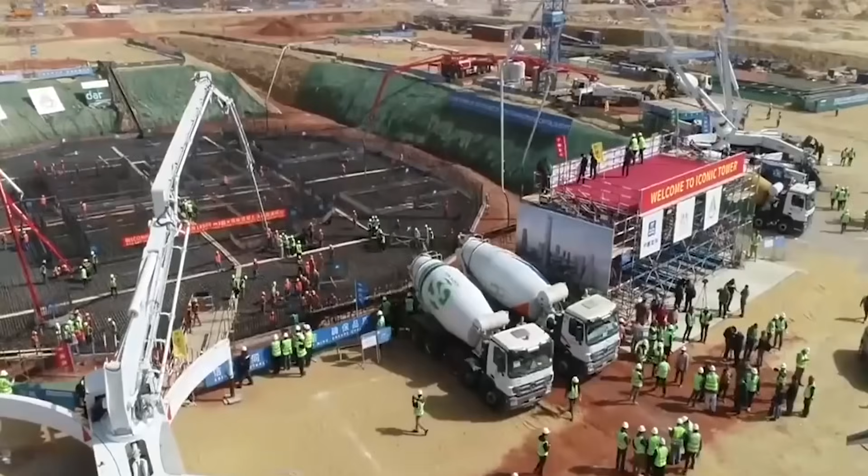And yet, this is not the end for China. In the future, the infrastructure maniac will continue to help more developing countries modernize, create new opportunities for development, and build a better, more livable world for all.

Each bridge, every road, and every project connects cities and countrysides, the present and the future, China and the world. Chinese infrastructure has not only reshaped the face of China but also exemplified the strength, spirit, and speed of the nation. The infrastructure maniac will never stop.